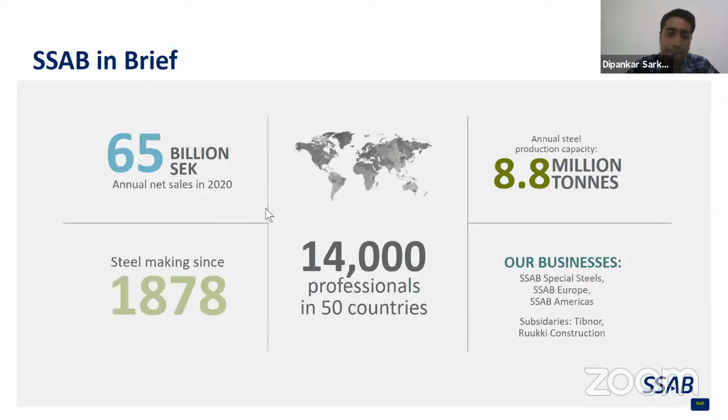So how we are present globally and locally, as you can see in the global world map, we are covering more than 150 countries with our sales support and tech support. We have 5 production plants in Nordic countries and 2 production plants in USA, in Iowa and Alabama. We have 3 production units in Sweden and 2 production units in Finland.

We are also having a tube and section manufacturing unit in Finland. In India, we have 4 regional sales managers to look after all the commercial parts and sales support, and 2 technical development managers, including myself. There are also 2 warehouses in Chennai and Mumbai, with a total capacity of 7,500 tons.

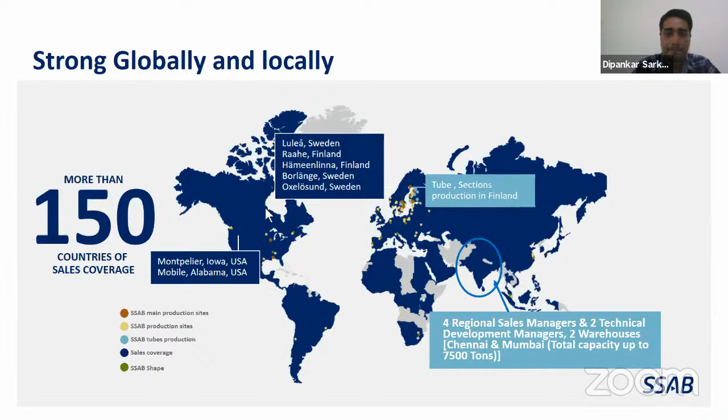So how are we upgrading? In order to upgrade the abrasion resistant steel, we have a vision in SSAB, that is to make a stronger, lighter, and more sustainable world. To realize that vision, we are providing high hardness and high strength products to increase the service life, and also increase the strength of the product with the capacity to reduce the weight, which also results in lowering the production cost.

And when you are reducing the weight, it leads to less fuel consumption and also less CO2 emission to the environment. So we are not only benefiting the customer, we are also benefiting the environment.

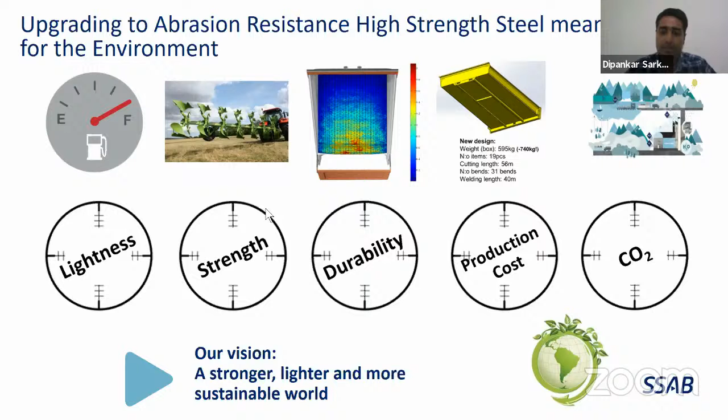So different types of wear which we are currently facing in the challenging environments like cement and concrete industries. We are mainly having 3 types of wear which we can see in the photographs: sliding wear, impact wear, and erosion wear, which we can also see in the cement and concrete industries.

So in sliding wear, as you can see, the abrasive particles slide down on the wear plates, and it will micro cut the wear plate surfaces, and it will worn out. The wear plate surfaces will worn out.

So in impact wear, the abrasive particles are falling at a particular angle and velocity on the liner plates, as you can see, and the wear plate will be subjected to impacts because of these abrasive particles.

In particle erosion, what happens is there is wear of particles, having bigger and smaller fractions, falling from a particular angle and a particular velocity, and it will wear out the steel plates and wear plates in the application.

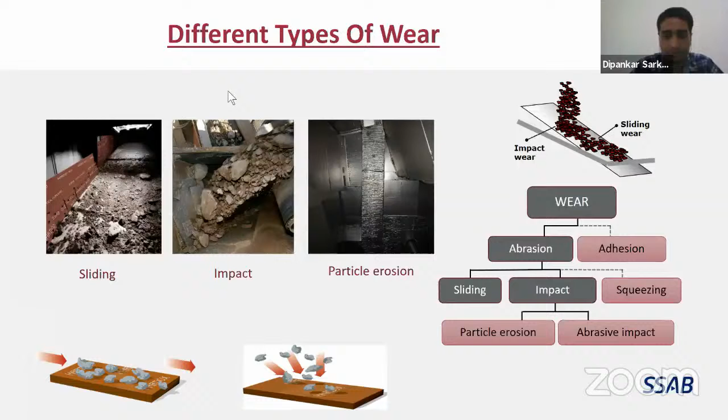So, Hardox wear plate product portfolio. Hardox is the trademark from SSAB, and only we can produce the Hardox wear plate, and nobody else in the world can produce the Hardox wear plate.

What we offer to the customer is that Hardox wear plates provide extreme durability because of the best combination of high hardness and excellent toughness. We have a range of 400 BHN to 700 BHN of hardness that we are currently supplying to India.

In the thickness range, we can go from 0.7 millimeter to 160 mm, and in width also we can produce up to 3.35 meters. We have an upper hand in through-thickness hardness properties, and the properties are very much isotropic, that is, same in all directions of the plate.

We also have the market's best workshop properties, in terms of cutting, welding, and bending. We also have some guaranteed toughness options in our Hardox wear plates.

And we are also making tubes and bars of 400 BHN to 500 BHN material.

We are also generating awareness regarding our genuine Hardox wear plates. We have a set of cross-check points you can always come back to us with to check whether the supplied wear plates are genuine or not. We have a set of questionnaires and cross-check points to verify the genuineness of the Hardox wear plates.

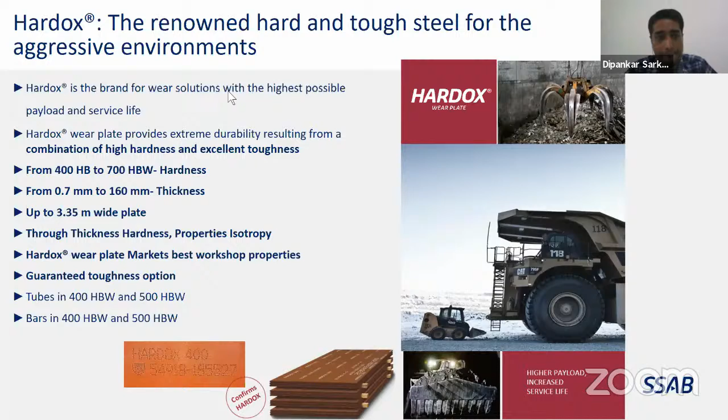There are many challenging areas we are working on, and we are trying to upgrade with our Hardox wear plates, in tippers and trailers, construction and yellow goods, mining and quarry, mineral processing, waste and recycling industry, metal and plastic industries recycling, and also in agriculture and forestry industries.

We have live case studies where we have done upgradation with our Hardox wear plate. Today we'll be talking more about applications in the cement and concrete industries.

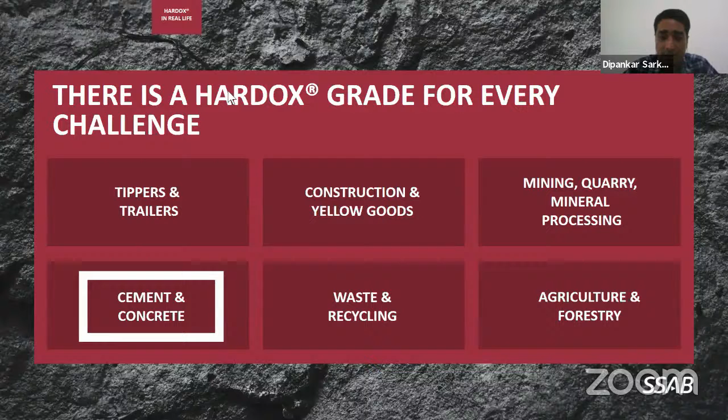So in terms of describing the competing materials in this aggressive and challenging environment, we have very hard materials like ceramics, which have very high hardness, but it doesn't have the impact toughness in its property. So it won't withstand the exact criteria of your application if it's subjected to impact or erosion.

Now we come to the chromium carbide overlay plates, that is hard particles overlaid in a soft matrix like mild steel. It also has its own limitations of impact toughness properties, so where applications are subjected to only impact wear, it won't sustain. It doesn't have adequate impact toughness property, so it will be limited only to sliding and erosion wear applications.

And then we come to rubber. Rubber is a soft material, and it has its own impact toughness, and it can withstand very heavy blows, but it doesn't have the proper hardness to withstand sliding wear in the application. So it also has the limitation of hardness.

So in terms of combining high hardness and high toughness properties, Hardox wear plates succeed to upgrade in these three applications. In terms of hardness and toughness, it has the best combination to withstand all three applications.

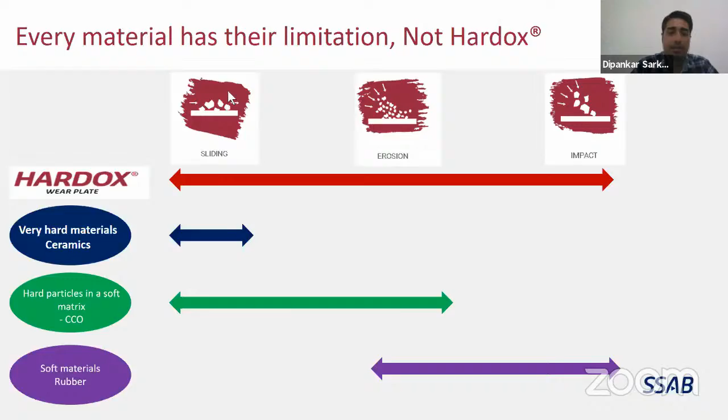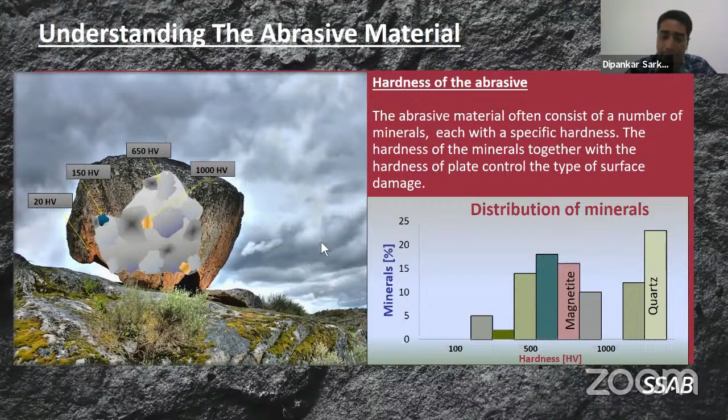So it goes with micro cutting. It cuts through the surface, and the wearing out of the wear plate will be very high. So according to the level of wear, we give the solution of what suitable hardness level you should have for your application to minimize this level of wear.

And also, with high hardness and high strength, how we can allow the customer to increase the load carrying capacity, the payload capacity, how we can do the weight reduction to make the structure light with increased wear resistance and dent resistance to give improved service life. So currently we are trying to solve these kinds of problems with our Hardox wear plates.

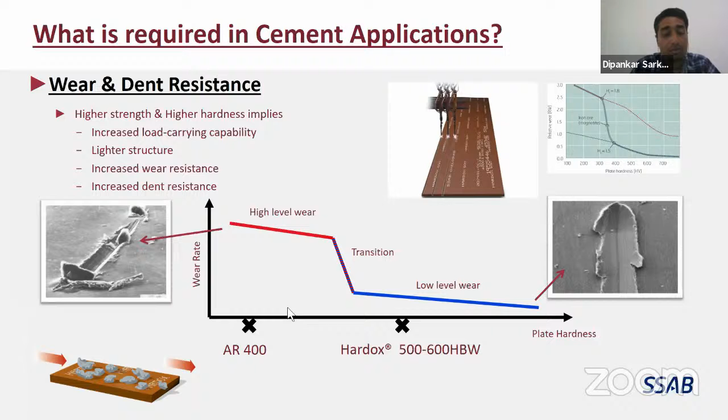So, for configuration of liner plates, we currently try to understand from the abrasive particles what type of application you are having. Then we try to understand what is the worn down criteria. The worn down criteria is at what time, at what worn out thickness, you are stopping the machine and going for maintenance.

Suppose you are using 20 mm liner plates, and the criteria to take the machine into a maintenance stop is 90% of the worn out thickness. So how are you trying to maintain that, how are you going for a maintenance stop?

So what we do here is look at the configuration of the liner plates you have, the application, and the nature of the abrasive you are using, and then we design the liner plates in a way that the main impact area should have the best toughness property to withstand abrasive particles falling from an angle and velocity.

And the side liners and end liners, which are only subjected to sliding wear because there will be no such impact, or very minimal impact, on the side liners, but this part will be subjected to sliding wear, so it should have the proper hardness. That's how we currently configure the liner plates for your particular application.

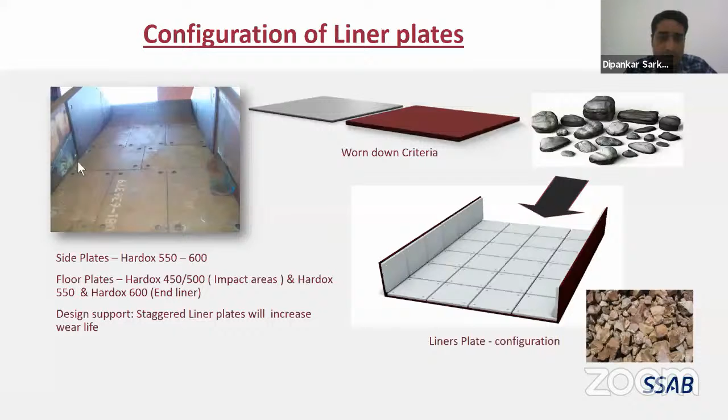And this kind of design support and material suggestion support is always given to the customer, and you are very much welcome if you have such pain areas in your applications.

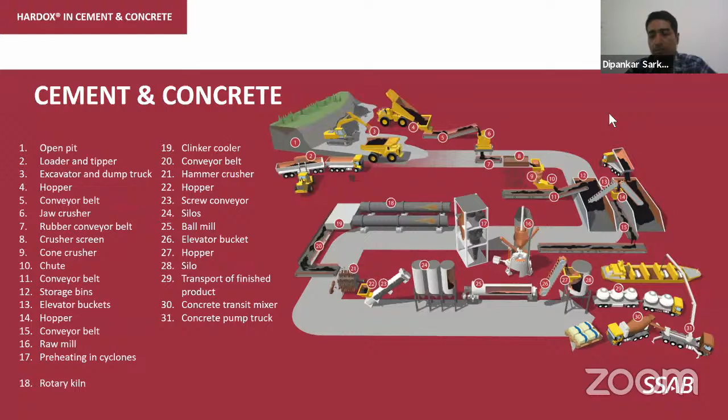Then we move further until the cement is produced and delivered to the customers. At the end of this schematic, I would like to say that cement manufacturing is a very harsh production that involves a lot of wear and tear, and using Hardox is going to be in your favor in order to extend the service life. As Dipankar said in the last slides, if you check the chemical composition of the rock you are working with, in cement you have a lot of quartz and illite and limestone, and depending on what kind of cement you are producing, the level of wear is very high. Hardox is here to improve the service life and decrease your maintenance time.

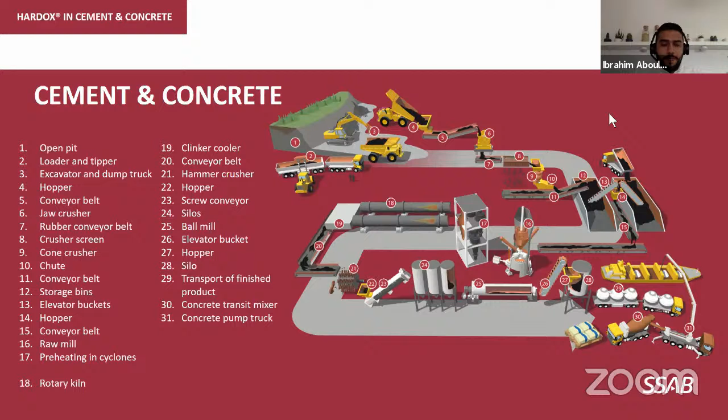So we spent a lot of time, in more or less a couple of minutes, to discuss what is the cement industry and what we can support with the Hardox wear plate. Now we go a little bit deeper into each application on its own to define what can be used and so on.

If we take the loaders and excavator buckets or shovels, we have a lot of parts here. For example, the shell part, which is the internal curved part that is roll bended, can be produced from either 450, 500, or optimally 500 Tuf. As I said, the 500 Tuf gathers all the great features of the Hardox 450 with its structural abilities, as well as the 500's abilities against sliding wear. So 500 Tuf is more or less the future of the 450 and 500 plates.

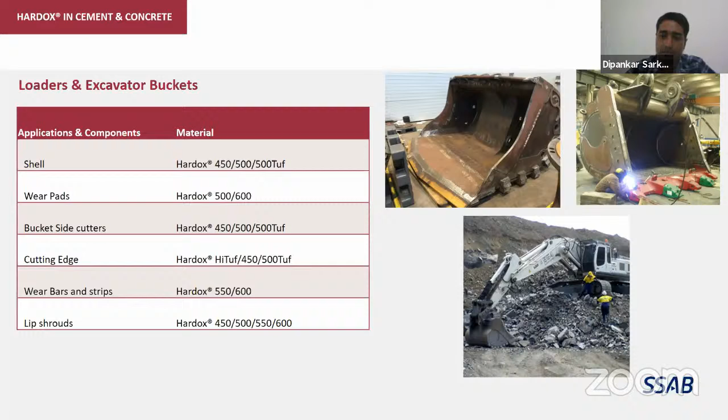Then we go to the wear pads on the sides, for which you have Hardox 500 or 600. The reason is that it's mostly sliding wear, so it's not a problem to use 500 and 600, which will extend the service life very much.

Going to the bucket side cutters, which are on the side, we usually also recommend 450, 500, and 500 Tuf. I would personally recommend the 500 Tuf, because the side cutters not only face impact from breaking or hitting rocks, and wear from carrying the rocks, but there's also a hidden use. The side cutters more or less work as a structural component because they hold the shell together with the cutting edge. So they have also a structural use, and for that the 500 Tuff would be the optimum solution.

Moving to the cutting edge, which is usually the front part that cuts into the rocks, it faces impact as well as some sliding wear. For that we have a specific grade, HiTuf, with a hardness of 350 Brinell, but superior toughness for a wear plate. There is no other wear plate in the world with the toughness of HiTuf. The idea is that it can be used in areas with very low temperatures, which I think exist in India as well, in some mountains where you have very low degrees, and in that case HiTuf would be the solution, where impact toughness is really required. Also for the cutting edge, the 450 and 500 Tuff are a solution, as well as Hardox 500.

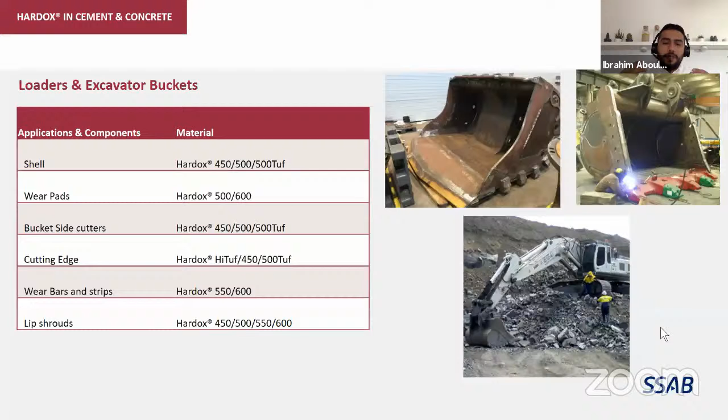Then we have the wear bars and strips, which are also 550 or 600. The reason is that it's mainly straight sliding wear, with not a lot of impact, which gives an advantage to Hardox 600 since there is no impact at all. Then we have the lip shrouds on the front, which can be produced in different shapes from Hardox 450, 500, 550, and 600. Since there is also not a lot of impact, they are more or less protected by the teeth.

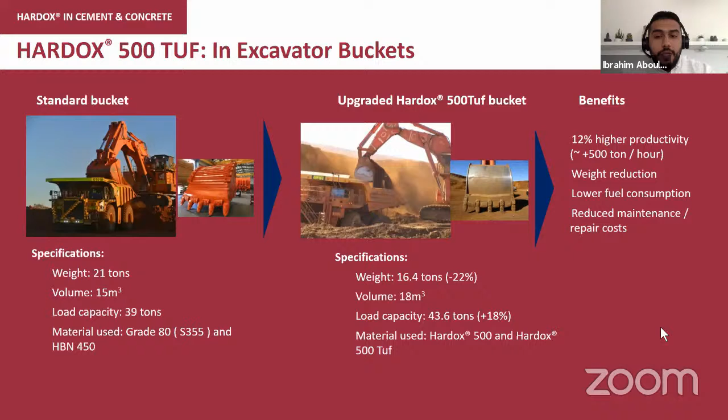It was produced from Hardox 500 and 500 Tuff. So with these benefits, they got 12% higher productivity, weight reduction, and lower fuel consumption. As Dipankar said, we are moving in the direction of low carbon dioxide emissions and saving the environment more or less worldwide. Also, reduced maintenance and repair is very important, since it helps you avoid stoppage in work and avoid the costs of maintenance.

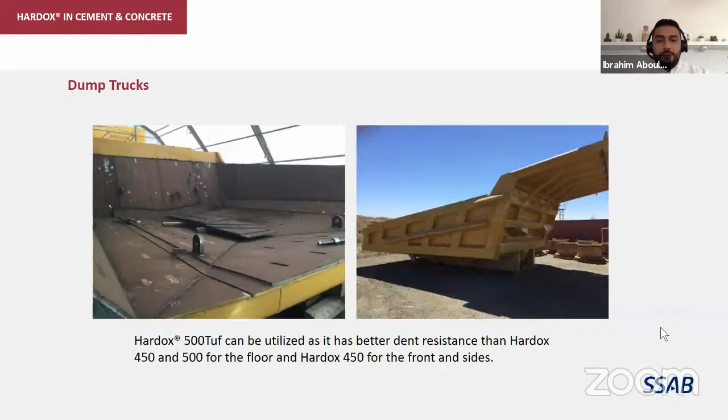The reason is that tipper bodies carry big rocks, but not as big as dump trucks carry. Since the rocks are bigger and harder, you need higher dent resistance. 500 Tuf has proven better resistance to dents, and you gain a 50 Brinell difference from 450 to 500 in hardness. So Hardox 500 Tuf can be used for the complete floor, sides and front, no problem, while Hardox 450 can be used where impact and sliding wear are somewhat less. Next slide, please.

One case from a customer we have: they had their own liner kit using 400 Brinell wear plate, with the whole liners weighing between 5 to 15 tons, and a service life of less than 8,000 hours. They came to SSAB asking how to improve their performance and productivity. Hardox 500 Tuf is the answer, with some additions of 500 and 550 depending on the use.

We increased productivity to around 12,000 hours, up from 8,000 hours service life, as well as using thinner material when upgrading to higher grades, which allowed us to decrease the weight of the liners and the whole truck. If you check the text at the bottom, reducing consumption from 300 liters per hour to 298 liters per hour, across your whole production, saves 12,000 liters per year. That's a lot of money and a lot of carbon dioxide emissions saved.

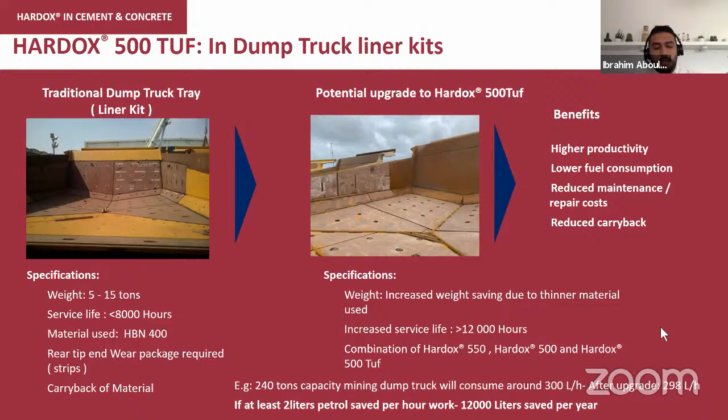Benefits: higher productivity, lower fuel consumption. Again, maintenance stops are a headache at each quarry, cement plant, or whatever site you have. If you have maintenance stops, you are losing money, no production, and that's what we can support you with. Next slide, please.

In this slide we discuss, for dumpers, the dead bed concept. You have a big dump truck relying on Hardox 500 Tuf and 450, but still need to improve with other solutions since you have a combination of different rock sizes and hardness. The idea is we can add triangular Hardox parts on top of your liner. It doesn't have to be triangular, it can be circular, stripes, or whatever. The main concept is that usually you have a combination of smaller rocks and much bigger rocks.

The gaps between those triangles, strips, or circles are designed in a smart way, not just mounted on it. The gap between each one allows the dumper to hold small rocks in between those wear pads. What does this help with? When these rocks are trapped between the liners or wear bars, the bigger rocks roll over the smaller rocks instead of sliding over your plate. So you are wearing out the smaller rocks and not your dumper body liners, which extends the service life a lot. This smart solution can be done with Hardox 450, 500 Tuf, and the wear bars can be made from 550 or 500 Tuf as well, greatly increasing service life. Next slide, please.

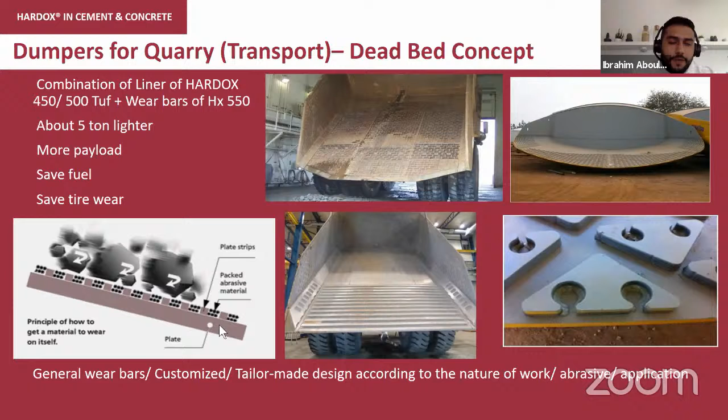So we finished the excavator and loader buckets, the dump trucks. Now we go to the tippers.

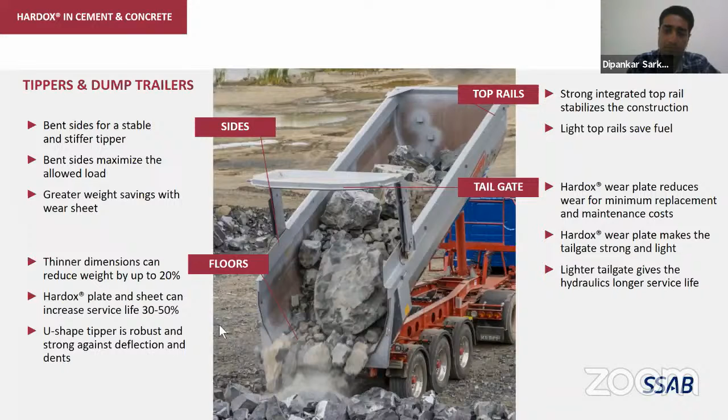Next slide, please. Then we get into the cement plant. We have a lot of hoppers and drain chutes, and they are regularly exposed to high flow, pressure, and impact. Using Hardox to fight wear and abrasion will extend the service life and improve the performance of your chutes and hoppers.

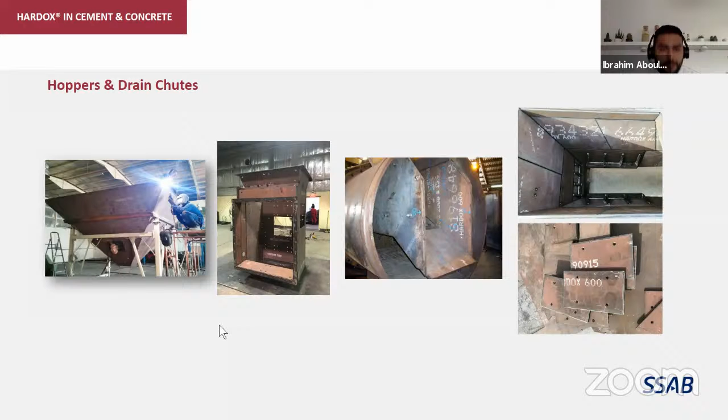Grades that can be used depend on the impact. You can use Hardox 500 Tuf. If it's more or less sliding wear, we recommend directly Hardox 600 in order to extend the service life as much as possible. Next slide, please.

Conveyor belts and screw conveyors. Usually the screw conveyors and conveyor belts are rubber, but they are relined with steel plates. And for that, like I said, it's sliding wear, completely straight sliding wear. So more or less, Hardox 600 can be used without any problem, since you don't have any impact problems in that case.

Then we have the screw conveyors, which usually move the granular parts and handle the bulk material. They are typically mounted right on top of the hopper, or sometimes a silo for storing. For that, we recommend using Hardox 500 Tuf or 500 in the screw blades, shown in the second picture from the right. So in the screw blades, we recommend 500 or 500 Tuf.

In the trough and tubes, you can also use Hardox 450, 500, or 500 Tuf, which will extend the service life of your screw conveyor. At the bottom of the slide, there are two pictures for clinker conveyor sprockets, and we have a lot of customer cases that prove the great service life and performance increase with Hardox 500, with thicknesses especially higher than 55 millimeters. We solved a lot of problems with a lot of customers in that.

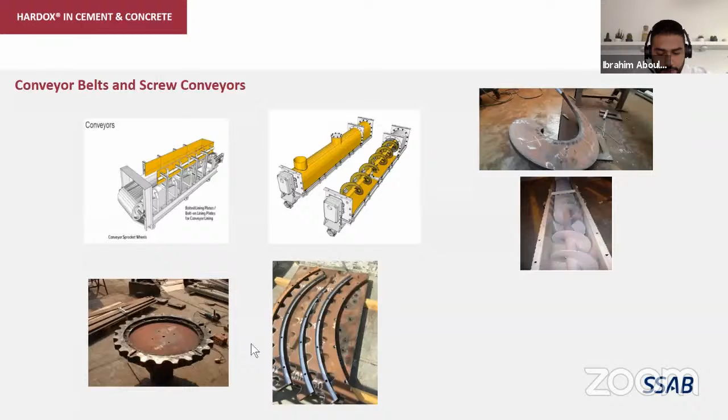Next slide, please. Then we go to the screens. Sorting screens can be used to pre-sort, classify, or size split, as we discussed at the start of the presentation. Only parts that have reached the required size can pass through, and Hardox has proven a lot of good performance, depending on the thickness, whether there's any complex shape, whether you need roll bending, and so on.

One good example is in the top picture to the right. You have Hardox 600 of 12 millimeter. This one was cut by laser cutting, and it performed quite great.

If you don't have a laser cutting machine, or no facility around you that can do that, plasma cutting machine, high definition underwater, can perform more or less similarly, and Hardox can support you locally to define the cutting sequence to follow in order to avoid softening the small steel parts between the holes, which is the main issue when it comes to screens.

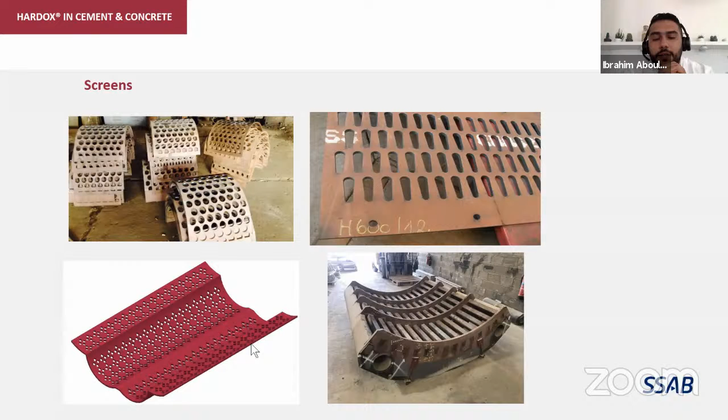Then we have the grizzly bars on the bottom right. The structural parts holding the grizzlies together can be done from Hardox 450 or Hardox 500 Tuf. The grizzly bars themselves can be done from Hardox 500. Next slide, please.

Then we have the elevator buckets. There are mainly three points I would like to discuss here. The first one is quite easy, the bucket itself, Hardox 450 straight. Service life is quite long.

It can be more than four years, so you don't have a headache with that. The second point, some parts where you have damaged elevator buckets, the main problem is the cutting edge. And if you have a problem in the cutting edge, you can use Hardox 600 as a strip in the front to improve the wear performance there. So Hardox 450 for the bucket, Hardox 600 for the cutting edge.

And finally, the third point is the casing of the elevator bucket itself. It can be also produced from Hardox 450, and it can extend the service life as well. I think in India, SSAB has had some success cases in that as well.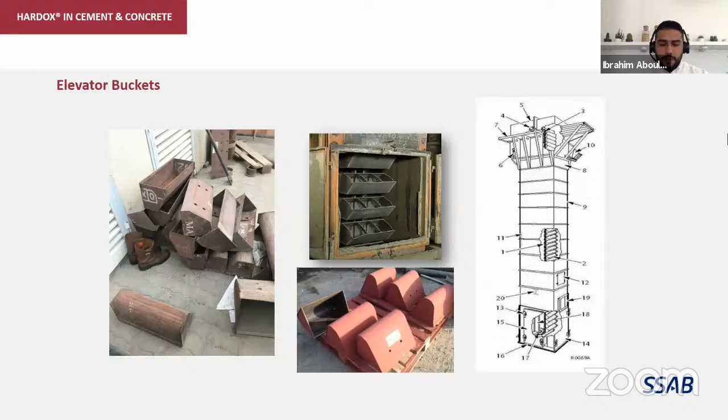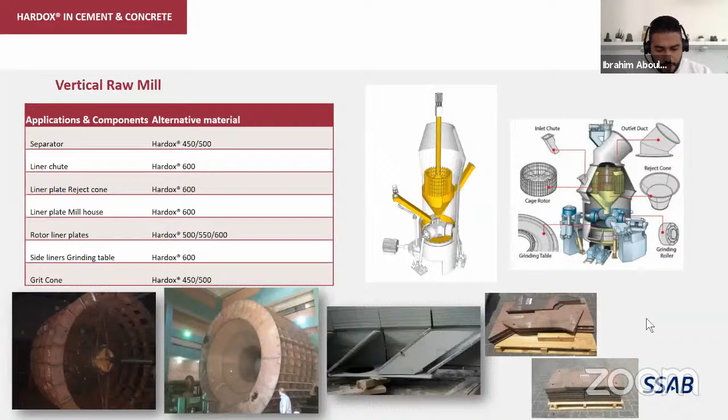I don't want to miss anything in this slide because it's quite important. Yeah, we can move to the next slide.

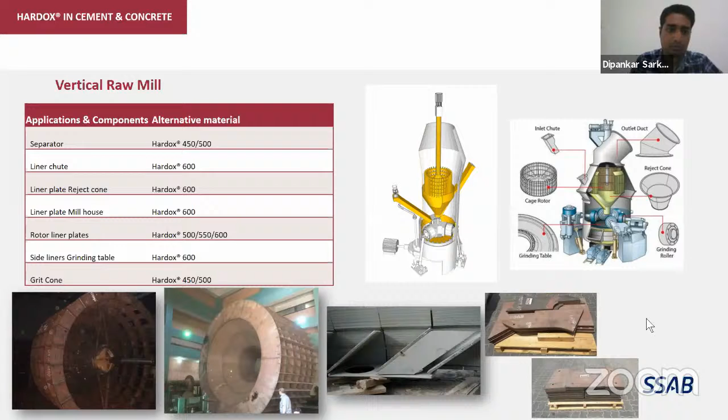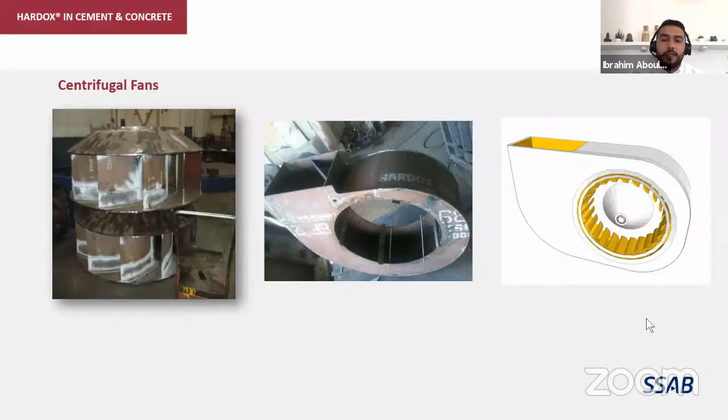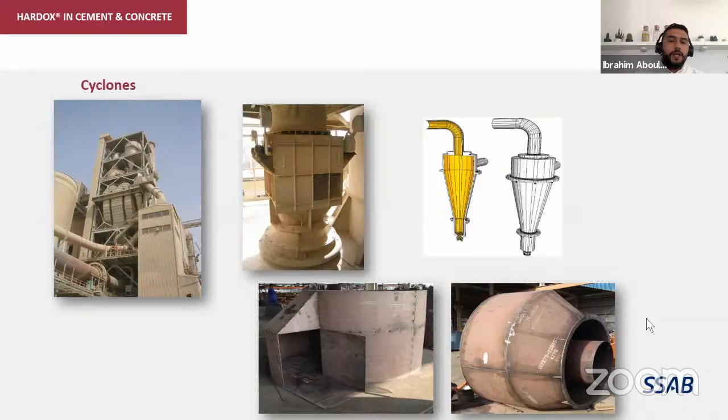Later on in the cyclones, it becomes around 900 degrees, which is quite hot for Hardox. And for that, there are some other solutions. Wear liners in the cyclone walls made from Hardox are extremely strong, and not only strong, they can also reduce the weight, which helps a lot during maintenance stops to change the liners.

Next slide, please. Then we move to the rotary kiln. In the rotary kiln especially, we don't have a lot of applications, since, as I said, the temperature is between 1000 to 1500 degrees.

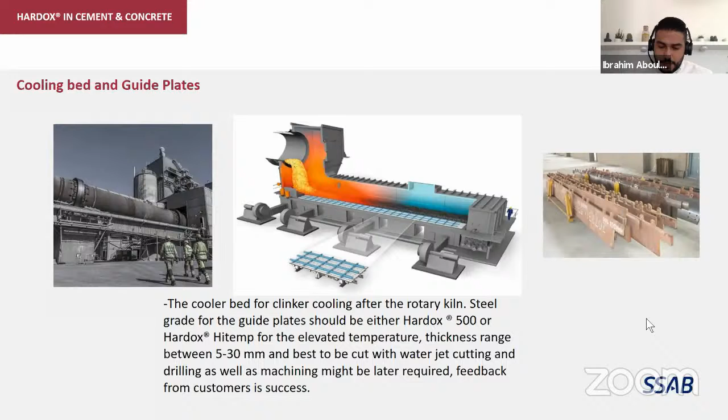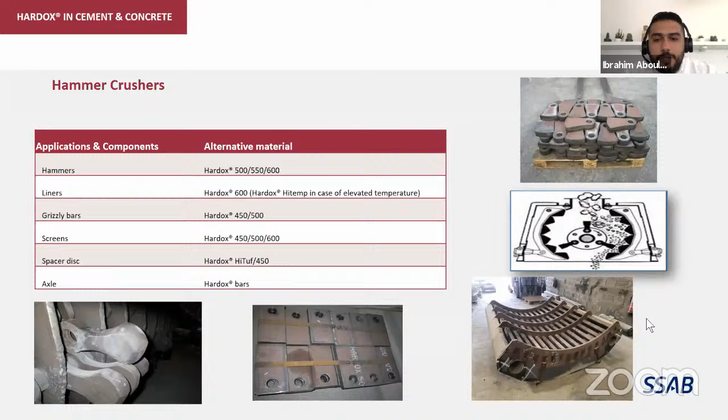Then in the final parts of a cement industry, we have the silos, which are used more or less for homogenizing, and they more or less define the size of a cement plant. In some cases, they are also relined, especially the internal cones. They are relined or produced from Hardox 450, 500, or 500 tough.

Then finally, we have the last grinding step, which is the ball mill. The ball mill is relined with more or less castings, but the castings cause a lot of problems. The weight is very high, which requires a lot of power, which is a lot of money, as well as the noise, which is very high and not allowed in many places. The solution for that is that we use Hardox 500, 600 embedded into rubber to decrease the weight and to improve the impact toughness using the rubber's ability for that, and it performs much better than the castings.

One more application, as you can see in the middle part, there are two green diaphragms. One is the intermediate and one is the discharge. So we have two sections in the mill. One is for grinding to a certain size. The second one is for grinding the second size. Those diaphragms have proven a lot of success in many cases, from Hardox 600 especially.

Since there is more or less no impact on them, they are on a different direction than where the impact is happening. They only pass the grinded material to the next section. For that, it's only sliding, and Hardox 600 has proven a lot of success in that. So you have at least 15% more service life than castings in the diaphragm, 15%. And that's quite huge for the ball mills.

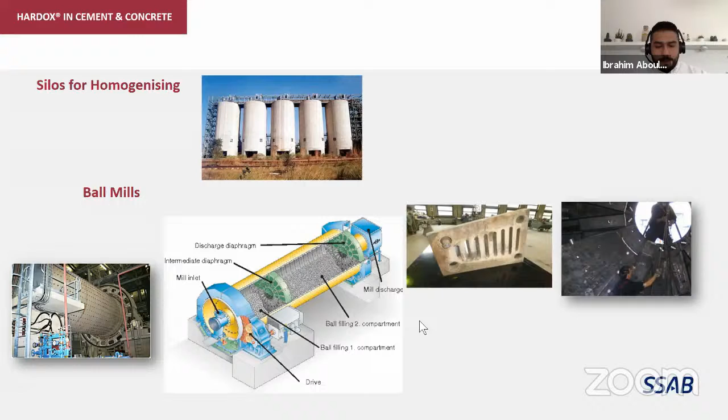Then we have the concrete. We go to the concrete. Usually we have concrete mixers, concrete pump trucks, and stationary concrete mixers. We can move to the next slide directly. We are running out of time.

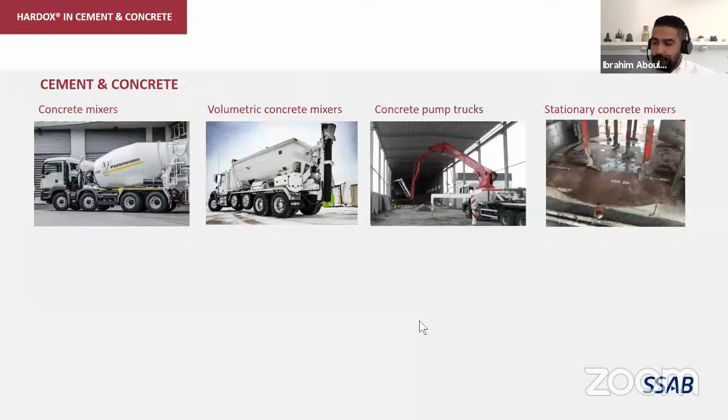In this case, I've chosen one example. If you take a look at the left side picture, you see the drum itself in the red color, which is produced from Hardox, and the chassis in the blue color, which is produced from Strenx material, Strenx 700. Then we have inside the drum shell, and we have the fins in the middle. Most of the wear is usually on the fins. The drum is having wear, of course, but the fins are the highest affected part.

We have one example to show you on the bottom right part. We have one drum from mild steel, and we have one drum from Hardox 450. The fins are from mild steel on the left side, and from Hardox 450 on the right side. The drum on the left side is 6 millimeter, and the fins are 8 millimeter. We reduced the drum to 3 millimeter on the right side, and the fins to 5 millimeter.

By that, we reduce the weight by 1 ton, which means much less fuel consumption, and the cost of production decreased by 6%. So you upgrade to Hardox, and you think Hardox is more expensive than mild steel. But at the end of the day, your complete manufacturing cost, which means material price, welding, cutting, bending, has decreased by 6%. So that's one of the benefits you get when upgrading.

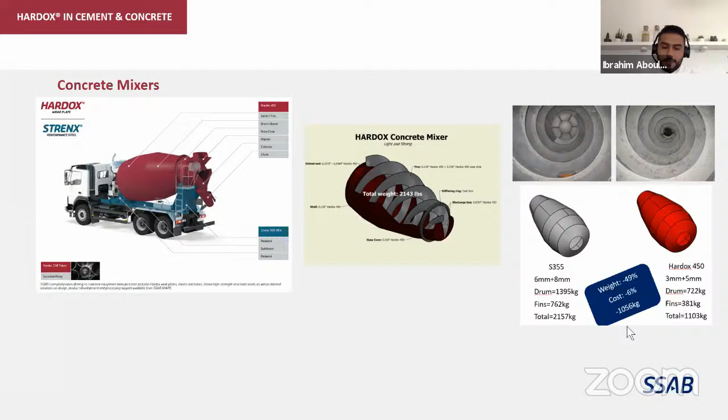For the stationary concrete mixers, more or less the liners for different types of mixers, such as planetary, vertical, and mobile mixers, can be relined by Hardox 600 right away. In some cases, if there is a complex shape, it can be from 500, but usually if there's only a little bit of roll bending or if it's flat, Hardox 600 all the way.

On the right side, you can see Hardox 600 in paddles. They are more or less 25 millimeter thick, and they are competing with Ni-Hard materials. Ni-Hard materials are very, very expensive, more or less the most expensive material when it comes to wear resistance worldwide. Comparing the service life of Hardox 600 with Ni-Hard, we have a 50% increase in service life in the paddles, and more or less an 80% decrease in cost. So Hardox 600 in that application is also great and performing quite well.

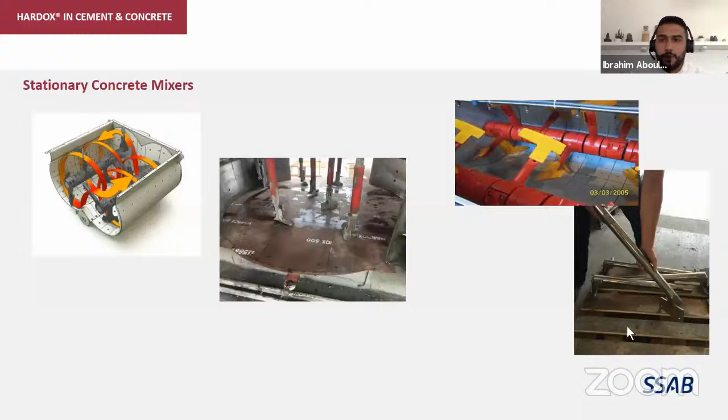Then finally, we have the concrete molds in concrete. In that case, we have different types of concrete moldings. We have paver mold and building bricks, and we have several other types.

Hardox wear plate can increase the service life compared to mild steel by at least 3 times. We usually discuss this a lot with the TDM or Mr. Dipankar. In some cases, we have molding equipment that pours the concrete; after it solidifies, there is some vibration, and then they remove the equipment. Having Hardox is a little bit tricky because of the vibration and the toughness required.

For that case, we have two types. The first is when you have high frequency vibration but very short time, like 5 seconds. In that case, Hardox 600 can work quite well. The fatigue life will not be reached, and you will not have cracks or any problems like that.

In some other cases, we have longer vibration times but very low frequency, which can get to 2 minutes of vibration. For that case, we recommend Hardox 450 or 500 tough, since the impact toughness will also not be reached. For the Hardox 600, you can reach up to 1 million concrete blocks, and for the 450 and 500 tough, it's more or less the same.

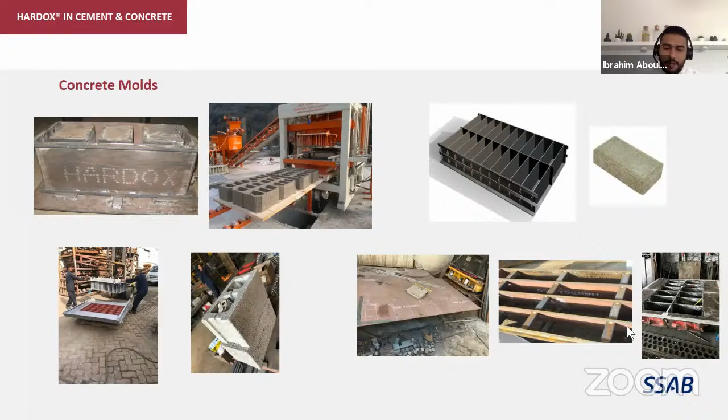Next slide, please. Keep in mind the conclusion: understand the material processed and what kind of wear it imposes on different applications. This means you have to study what rock you are working with, its hardness, shape, sharpness, and so on. Be aware of areas where the temperature is over 250 degrees.

We discussed that service life increase means less maintenance, which means less maintenance costs and less downtime. Weight savings mean more payload, so you can be more productive, with less fuel consumption, less costs, as well as less environmental damage. You have to think about availability.

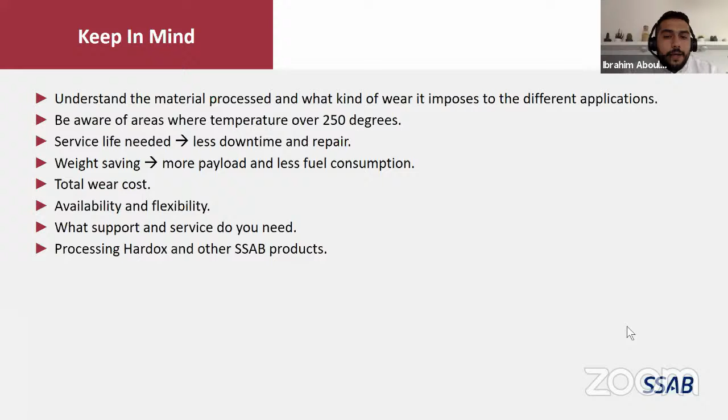When you are using CCO plates or castings, it's not available all the time, and the price is quite fluctuating. With Hardox, it's much easier. You can get supported by a wear part center or a steel service center, and the material is always available in stock. We can support you technically in all cases, especially in the processing of Hardox and other SSAB products in the workshop.

Next slide. My final slide is some discussion about SSAB mobile applications. You can download all these applications on your mobile phone, either from Google Play or Google Store, or from the App Store on the iPhone.

We have Hardox Wear Calc, which can give you comparisons and relations to what happens when you upgrade from mild steel to Hardox, or from Hardox 450 to 600. It's a nice application, and we can support you with that.

Then we have the Weld Calc, which helps you get the parameters for welding SSAB products, Strenx, and Hardox. You can download that and check: I'm welding Hardox 600 5mm with Hardox 450 10mm — what consumables, what parameters can I use? The application will output that.

Then we have the SSAB Bend Calc, which is similar to Weld Calc. It will help you get the bending parameters. You can say I'm bending Hardox 450, thickness 10mm, length 1 meter — what are the bending parameters, the punch radius, the die width, the tons required, and so on — and it will output that for you.

Finally, we have Smart Steel, an application that can help you track your plates to avoid fake Hardox. You give the number of the plate you have, and it will give you the MTC, the Material Test Certificate, and help you track and trace your plates and get commercial offers and so on. It has a lot of features. All of these applications are free and downloadable from Google Play or App Store.

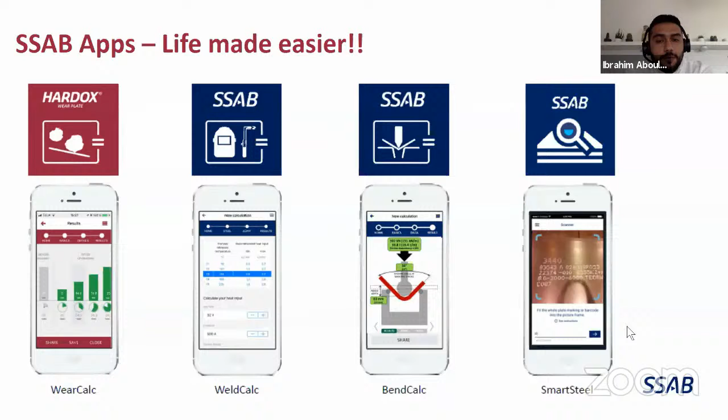Next slide. Thank you, and now we move to the questions.